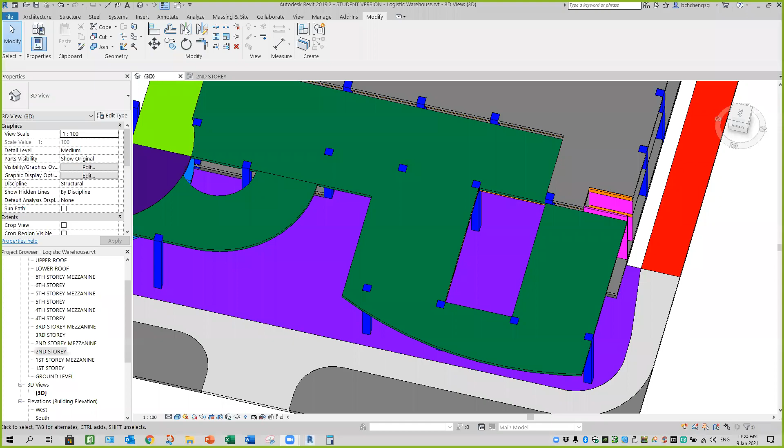Okay, so I was saying just now, I did create the slab here. I changed a different color to differentiate that it is flat. I call this the spiral ramp landing, same thickness, so when I decided to draw another one, you gotta redesign the angle again. You just confused? I got that's a good one.

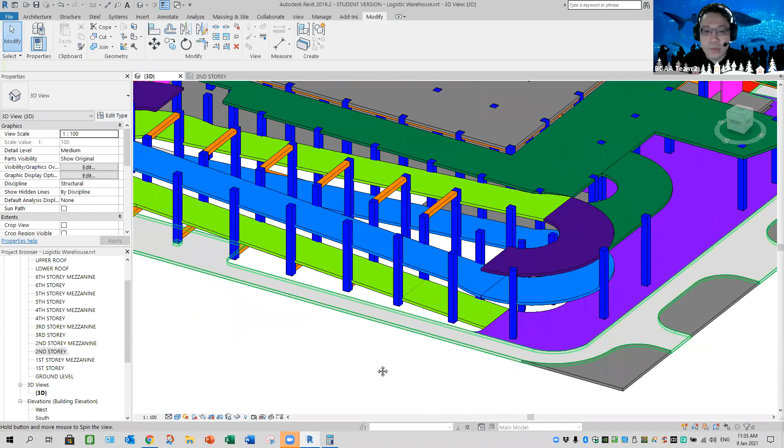Oh, okay. So please, now I actually did release the portal. So just now I was saying, this is what you call the suspended slab. So actually I should have another column here. I should have another column here. Or actually by right, there should be another one here that creates a connection.

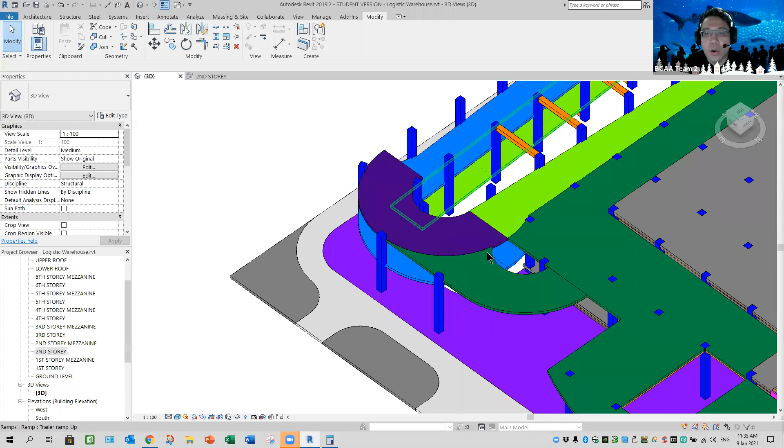So here in between should have a circular beam that supports. Because here should have one beam across. Here should have one beam across, and here have nothing. So the beam can go from here to here, connect, or from somewhere here connect. So I think some design change is needed here. See, Archi just randomly placed it in,

and yeah, something is missing. So I'm going to create this another slab which is connecting here at my level 2, that means second story. So you can see that I'm creating here, and some support added or required.

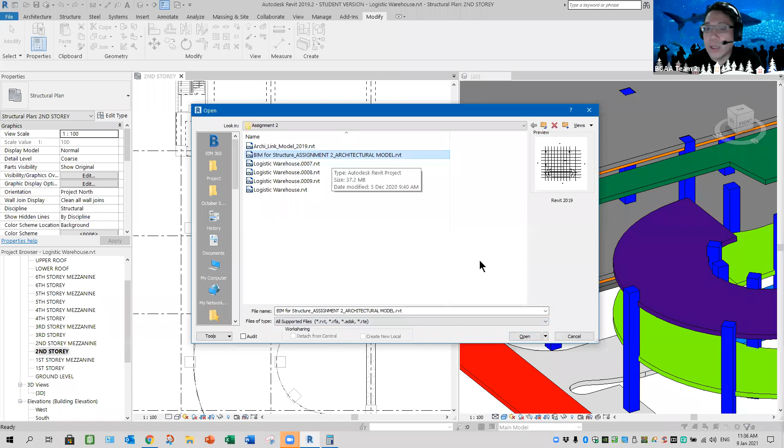I don't know what is this thing that is here. Sometimes very misleading. So at times, if you are not sure or not clear, my suggestion to you is open up the Archi model. So this is my Archi model name. The one I given to you is called Archi Link model. Actually, they are the same. It's just that I don't want to create a conflict, so I just give a different name.

So I want to see how the slab here is being connected. So I'm going to open the model from here and take a look at the 3D. Okay, so from here, this is the model.

What is the break there? Can't see clearly. I don't know why there's a slab here. I mean, the what do you call it? Parapet wall. Parapet wall should be straight. So some design fault down here. Very weird. Why is it stopping the vehicle from coming in?

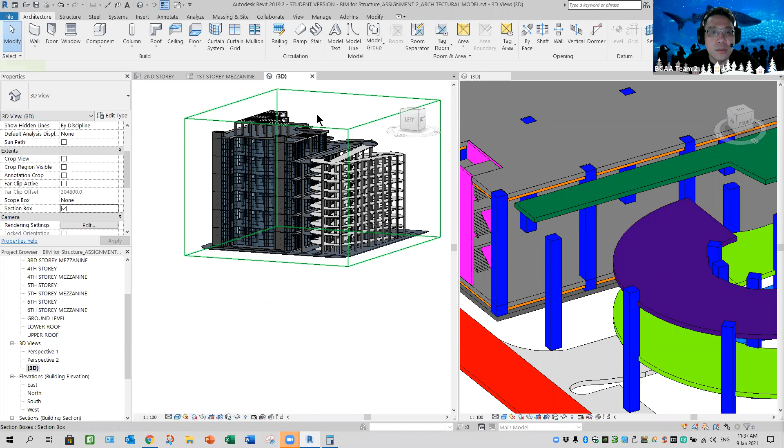Okay, let me enable the section box. Then I'll crop the view so you can see. Next week you should see my model more or less completed. Left only the roof to share with you guys.

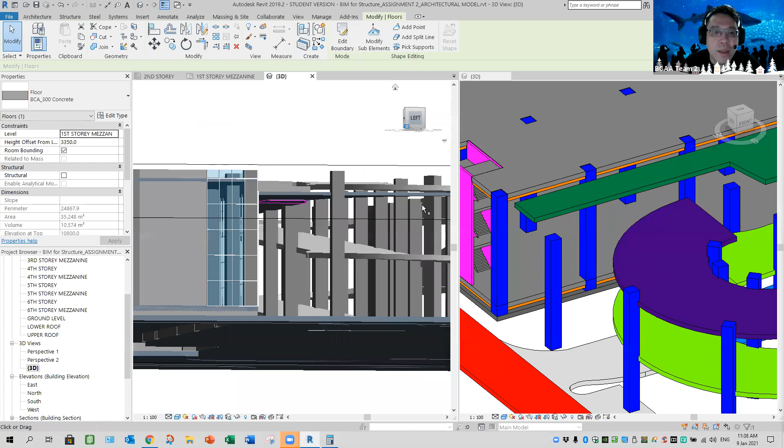So from here, see when they design the slab, there's two separate or overlapping slabs, which is not meant to happen. It confuses us. So that means my design here is wrong. Okay, this slab is more or less connected, but I don't know why there's some rubbish overlapping.

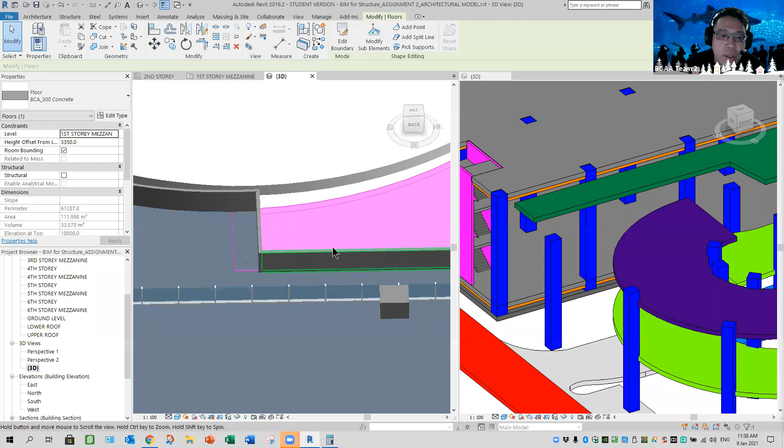Let me delete. Yeah, it's overlapping from somewhere. Okay, so this one is separate. No wonder there's two lines overlapping also. So I was thinking, why is there an overlapping component created? Why can't we just join them together as one?

See, it's very confusing. Okay, understand. So we don't design their method, which is messy. Okay, I think I'd better save that file, update them.

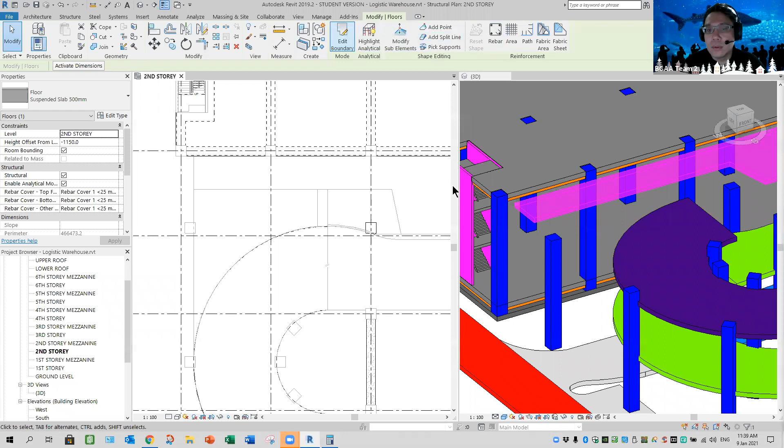So I'm going to select this because this creates the confusion over there. How come there's a line and so on? I'm going to modify this, edit, and copy the profile, which is here. So select, pick line, pick the arc here, and so does the arc here because it's a different contour. Now here a bit messy, so select this first. It should have an opening from here.

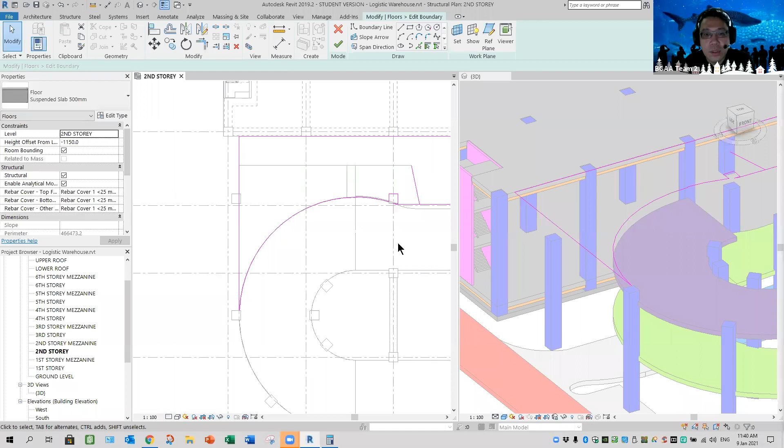Then pick line this, okay, and join this and this, okay, like that. As for here is this one and this join. So some of the extra things that are not required, you got to delete away because it should not be a separated slab. I don't know why.

So Archi file itself is, oops, what happened? Oh, overlapping. Two components identical. Oh, they are not joined. No wonder. What's happening? Hmm?

That's kind of weird, hold on, let me delete this. Okay, extend. Hopefully these two can meet. Clash into here, okay leave it. Important thing is you are able to close, so it should look like this. Yep.

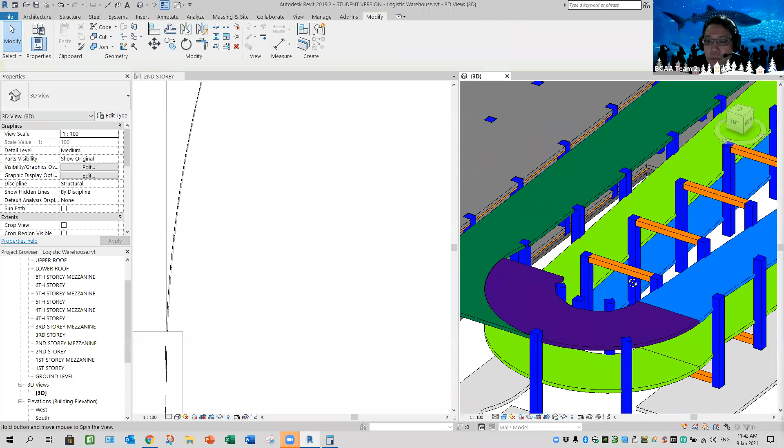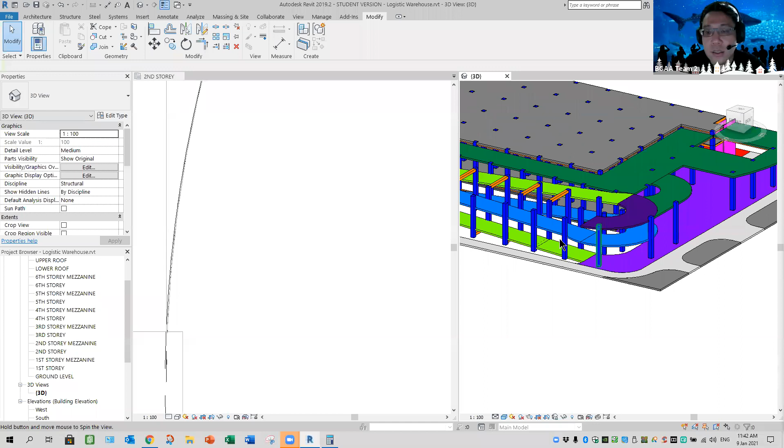Okay, so it's flat, so when your vehicle going down, it travels the way down to the blue one, then go out. So as I explained to Edgar and some of them just now, this is how it should be flat. But you can see the Archi design, this is twisted, how it reacts. So you can see some adjustment needed here, especially this ramp now to the next level.

Okay, so ideally, to avoid confusion, once you're at this level, you may copy and paste to the next level. So at least you can design where to stop the line and do some angle calculation adjustment, because from the Archi model, this suspended slab is the same throughout.

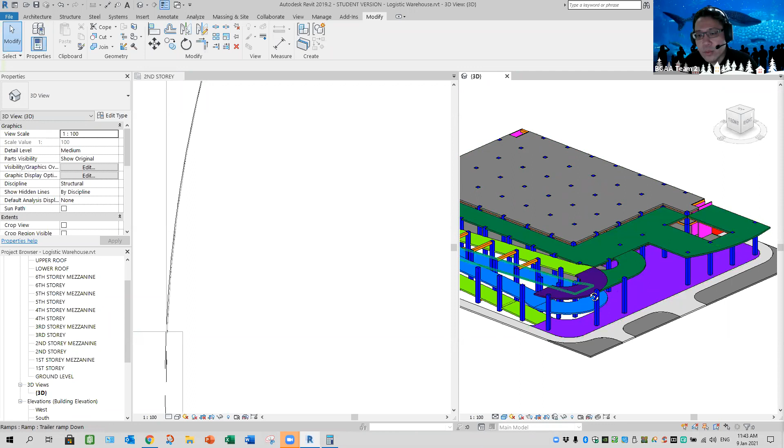All right, so that's what I said, that's why I said here, when you design this, do it level by level. Once the level is done correctly, slowly build your component up. Oh, so this is why the last 2 days I was thinking how the thing will look like.

Yeah, okay, so without further explanation, I will try to finish the staircase for this. Okay, so what I'm gonna do now for this here,

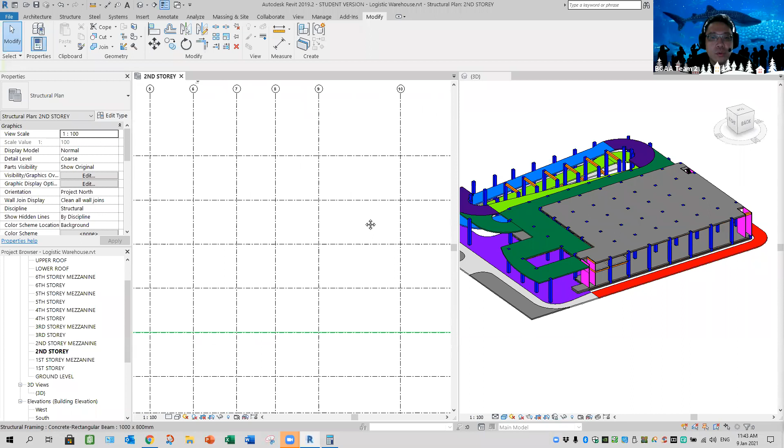I'll try to share with you all the information based on what I captured as it goes by weekly. All right, so take a closer look on that.

What I'm doing here now is enable the section box. Okay, then I'm going to crop my view, make it easier to see.

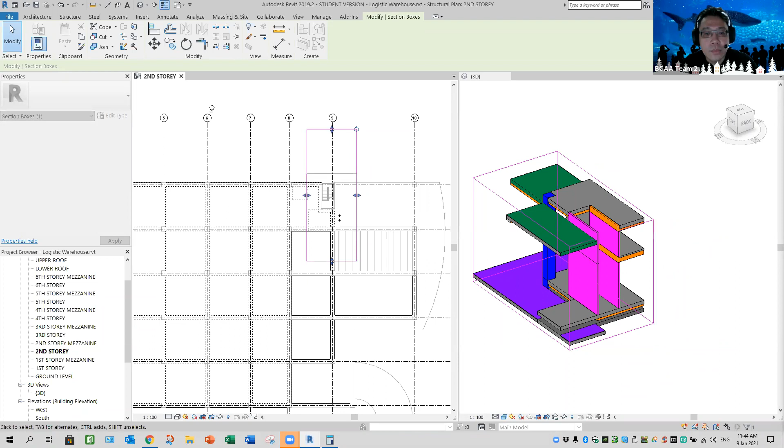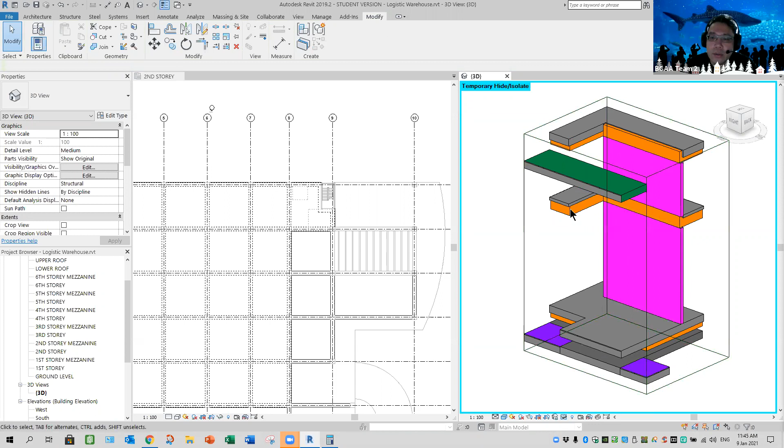Okay, so notice that, what you call that, there's level 1 to level mezzanine, then mezzanine to second story, they're different. There's a landing in between.

Okay, so let's go back to first story. Yep, like this, zoom in. Okay, you can see the arrangement is identical. I don't know why this guy copy is also, there's an offset. Very weird, I don't understand.

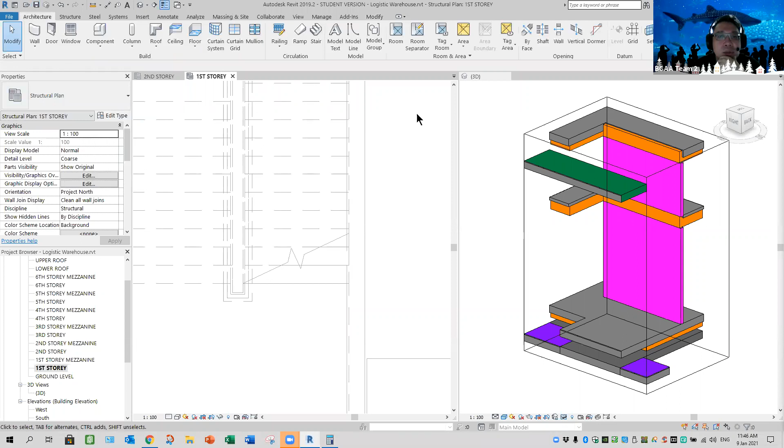Okay, so it's going up this way also. Okay, so I think we can snap from here straight away. So I call this staircase exit 2 because of different level. Here I will create one called exit 1.

Duplicate, everything the same, no change. Duplicate, exit 2. All right, so no change at all. Be okay.

And of course, first story to first story mezzanine. Yes, 7.5, it's not 800 lah. Oh sorry, it's not 8 meter, slightly lower. It's different, huh? All right.

So same thing for the straight flight. So I'm going to follow here. So let's snap first, I think here should have a 50 mm. But let's wait and see whether it throws any error or not.

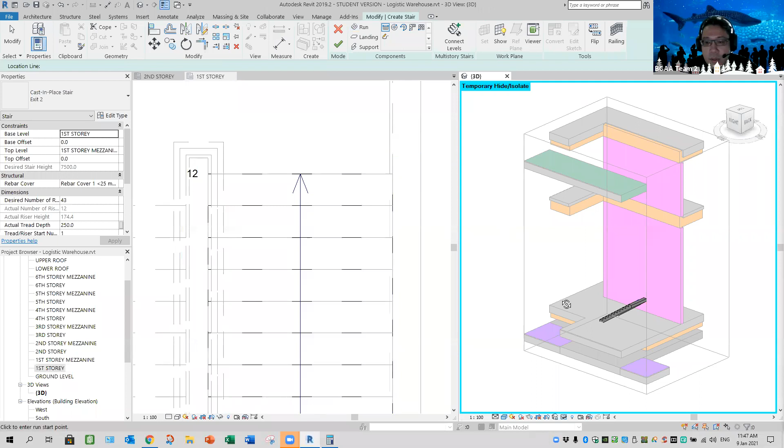Okay, I'm going to select from here, 1 and 2. Okay, okay, the view here, let me see. Okay, I think this way is easier to see. Okay, you can see from here it's sitting inside, so I think here should have a 50 offset.

Yep, it's coming up now. Yeah, so it's okay. So next will be here. Now will be a bit tricky, the distance here for snapping.

You're going to snap according to the wall, not according to this here, because this is not accurate. Okay, let's do a double check measurement, make sure it's 3000. Oh, it's not. This area here is slightly narrow, short of 25 mm.

Notice that means the Archi model is not accurate. Yep, no wonder I see a gap here. See this? I believe this should contribute to that 25 mm. Ah, expected.

Okay, so this wall is wrong. Let's finish first. Maybe, yeah, the Archi guy maybe tries to make us understand, so sometimes don't be fooled.

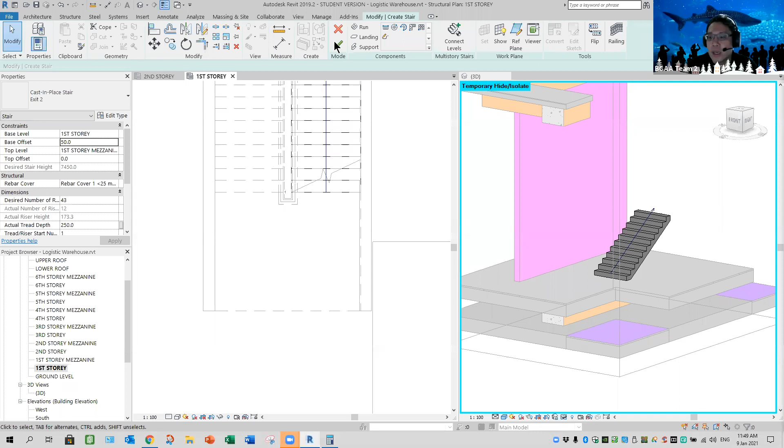I would like to measure, because look how weird, there's no overlapping on these ends. You see? Yep, I got you, you are right.

So here I'm going to adjust my wall first, so I got to reset this wall back to make sure that it's clear. Yeah, see the 25 mm extra? Not say extra, short. Normally it's normal to have an extension, but it's too obvious already.

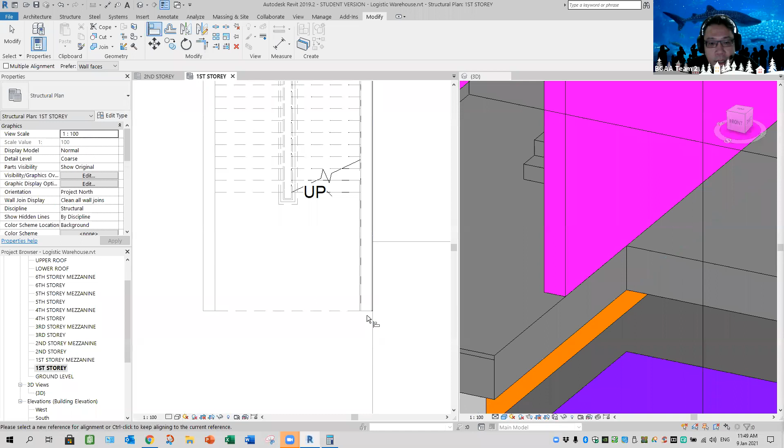Okay, so I'm going to readjust this, modify, align to this wall, this to this. So it should be shifted down, see the double line. Okay, the top one, same thing also, align based on the surface and surface. Yep, so that means this design here should have some adjustment.

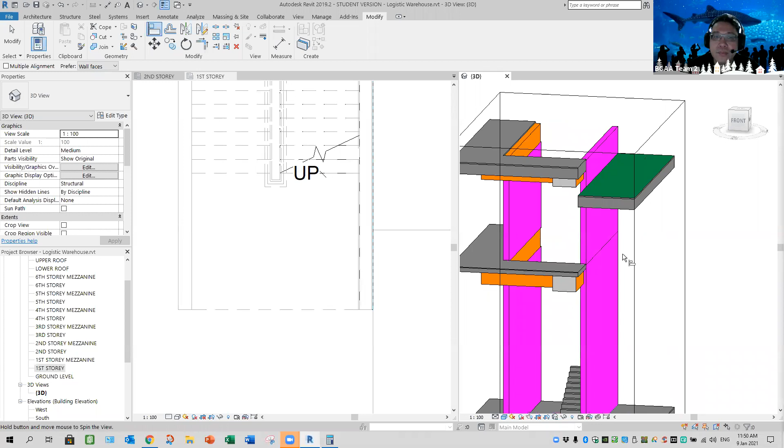Okay, so level 2 here should have some overlapping. Yeah, expected. Okay, let's modify this at the boundary, double check. My model looks okay. Yep, it's in line, so it's good.

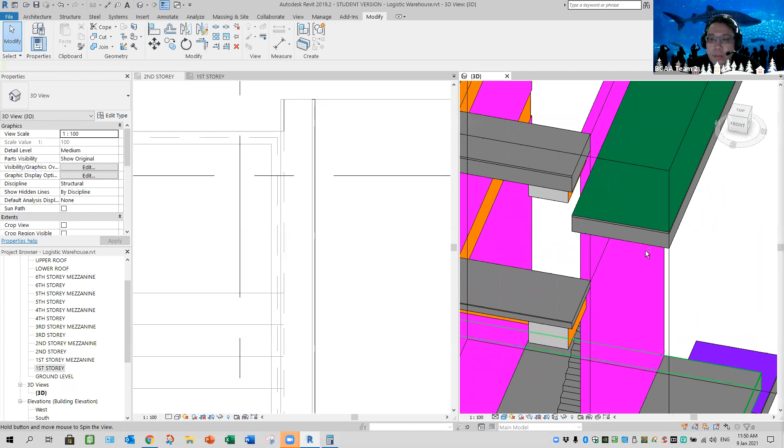All in good hand, lucky. Yep, okay, so seems good, I can proceed now to the model. So let me hide this wall again, sunglass, hide. So sometimes when you guys do design, got to be extra careful. Yeah, very tricky.

See, I see some extra thing down here. Archi model is really full of funny stuff. I don't know what happened, how they design the thing.

Okay, so select and edit stairs. Then of course I got to do the adjustment because this is correct. Is it? Hold on.

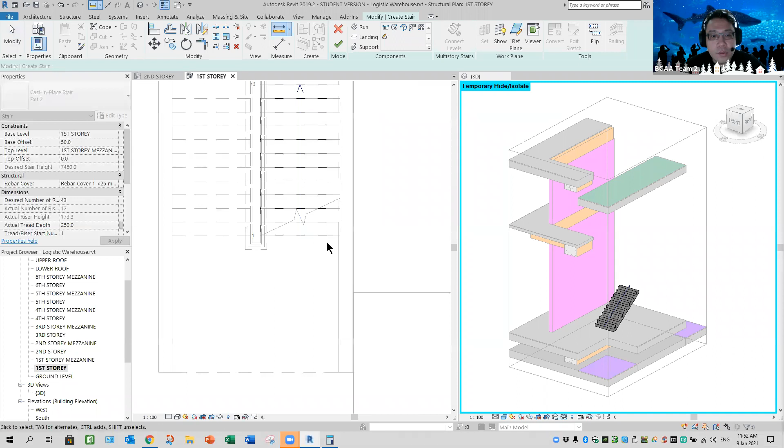Distance from here to here, 3001 now. Okay. Our staircase seems to be okay, it's correct, right on track. Measure here to here, 1625 minus 150, 1475 should be. Yeah, okay.

So run, select this, stop here. Okay, continue, here again, goes up. Then last one, which is here. Yep, complete. Still some more. All the way. Wow, scary, eh? See now,

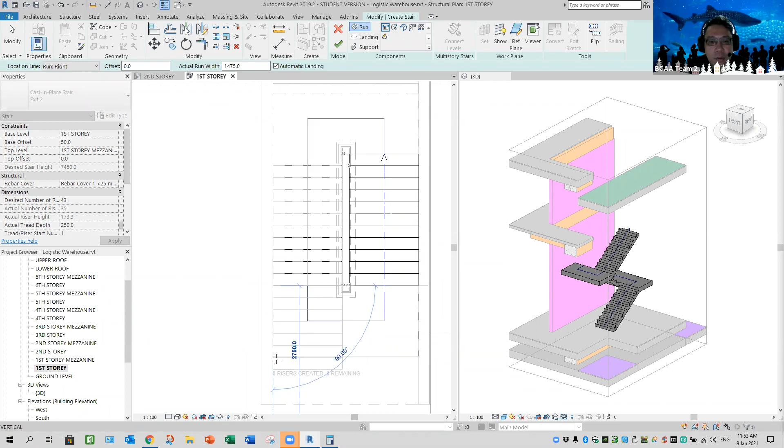the levels a bit weird. Okay, what's happened to my design? Oh sorry, the snapping doesn't continue from here. Hold on, should be here. Yep, finish it.

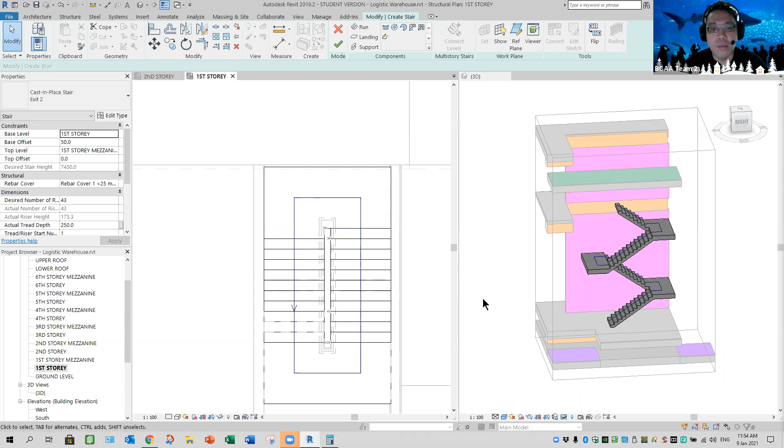But you can see that it's really short by 3 step flight. That means of this additional step flight here. Okay, that's why it's short. Okay, so that means it's wrong, so wrong means I will delete all this.

It's wrong. I try to match the design, and this is a dotted line. We should not go over it. So run again.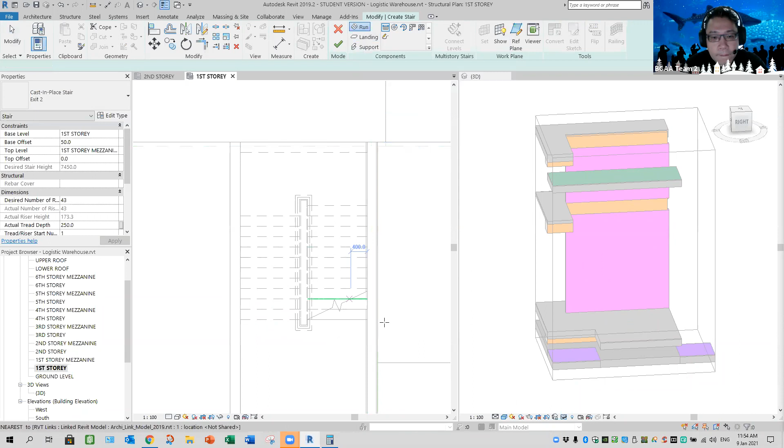Here, stop at this. Yep, then maybe from here, continue. From here again, up to here. Last level, from here. Still one stair flight short.

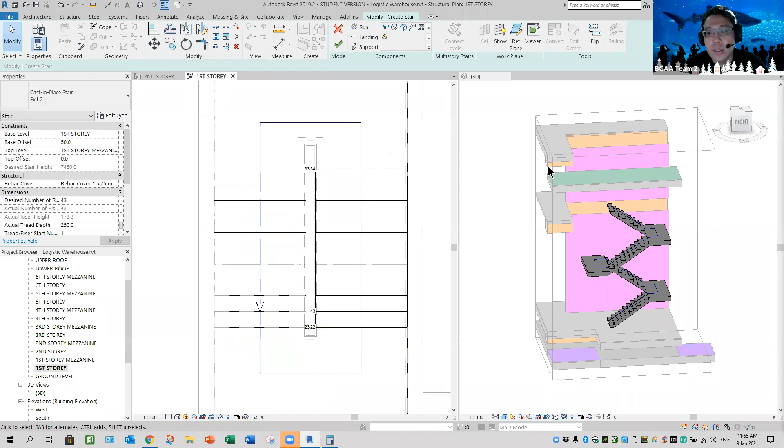Actually it's correct lah, because your landing is considered 1, as I mentioned earlier. So you look carefully, it's still correct. See your landing? It's still 1 stair flight count. But at least now, this is extra, which is not meant to be like that. So now it's correct, okay?

So as I said, we adjust this, so my model, pick this fella. So now at least take this as a guide lah, to stop there. One, 4, 7, 5.

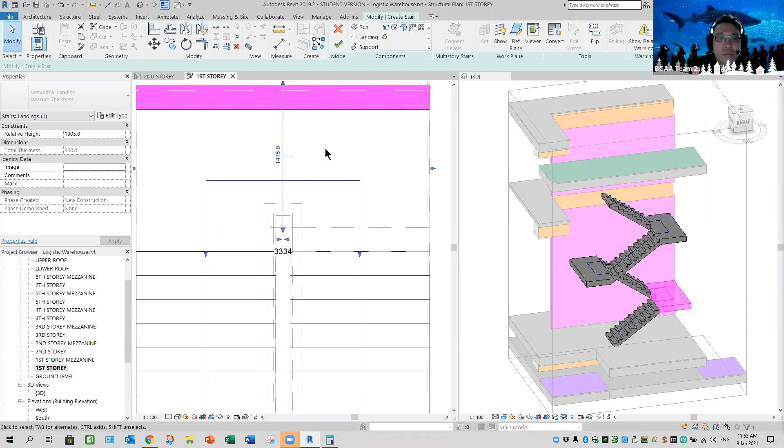Okay, the exit doesn't matter, we can move it, still plenty of space. Here we don't have that line, so I'm going to reference plane, pick line, offset 250, somewhere here. Adjust your landing, drag it, touch this, change it, 1475. Yep. Get this one.

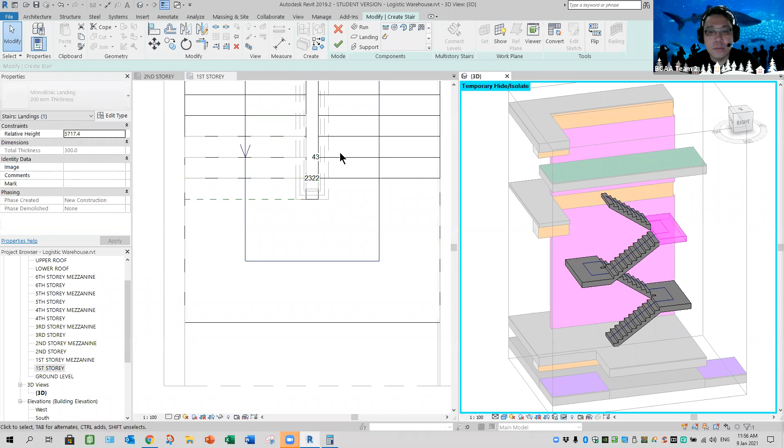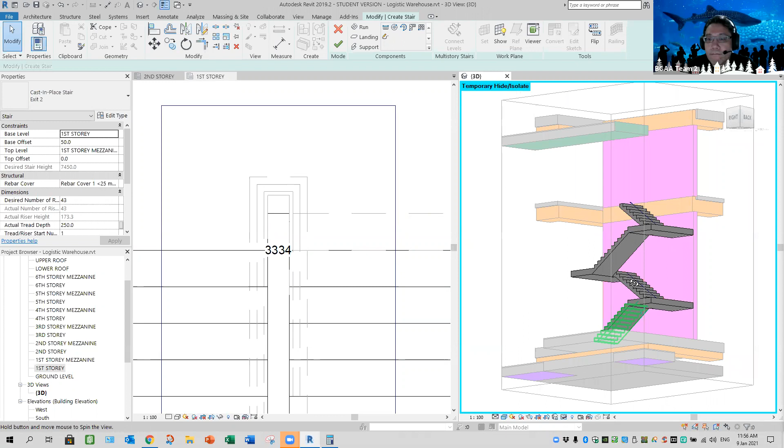Okay, so this stair flight done. Okay, the connection here to this later first, because I'll do this second mezzanine to second.

See any difference in design if you want to follow. So I need to go to level 2. Now level 2, you might see your staircase here, which is sometimes quite misleading. Of course, you cannot draw the separate one on top. All right, yeah, because the design here level is different. So I just click finish first.

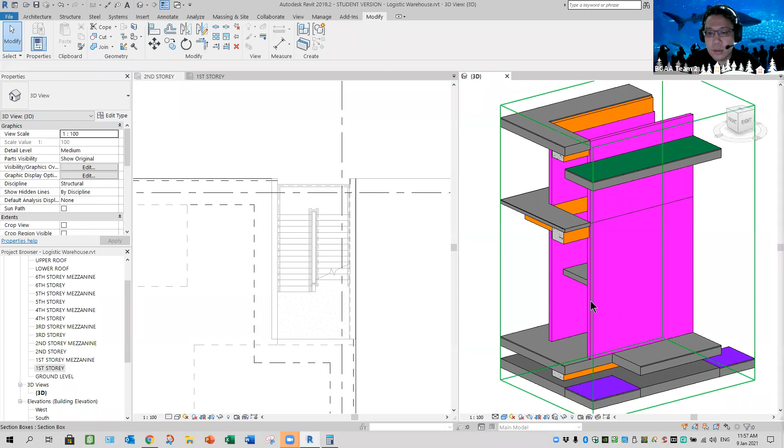And to avoid confusion, temporarily, I will hide this also. Yep. Okay, so in your view, this view, you can leave it. Yeah sorry, let me reset this. Only in your plan, we want to hide. Okay, because 3D model, we can

see how the model works here. Yeah, so we can estimate later the landing and so on. But in our plan here, can we see any staircase? Seems like I can't see or select any staircase here.

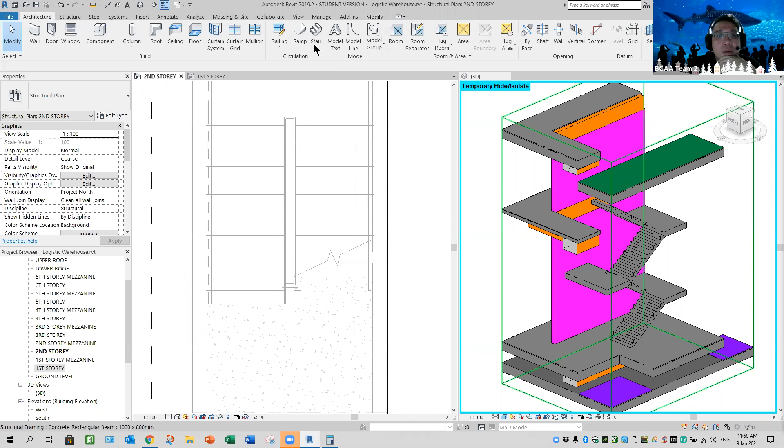Okay, so you can see the adjustment, there's a bit difference. Okay, so let's proceed. Second, stairs. In this view, is second to second mezzanine. No, it's to be first mezzanine, or you can actually open up your first mezzanine plan. Yes. Oops, join here. Yep, not there.

Okay, first mezzanine to second story. So this is 4.5 meter, 26 stair flight, so that means it's 13 stair flight. Okay, you notice that the Archi design here, they care about this, but this space become cramped. See, it doesn't comply the code.

So we got to be careful. That's why I say we sometimes we need to relocate. Do not follow them blindly. All right, I'll still draw from here. So now they increase to 26 stair flight, 4500.

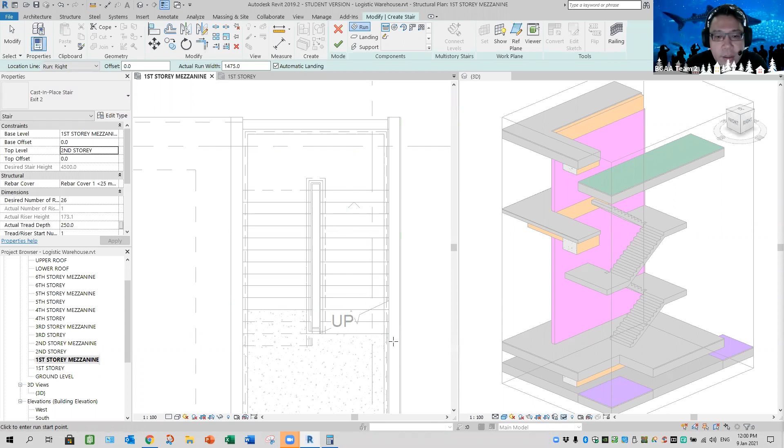So run, 26 means even 13 stair flight. So select from here, be sure this is the correct one. 13, 11, 12, 13, yeah. Then if we follow 13 from here, which is this, exactly flush.

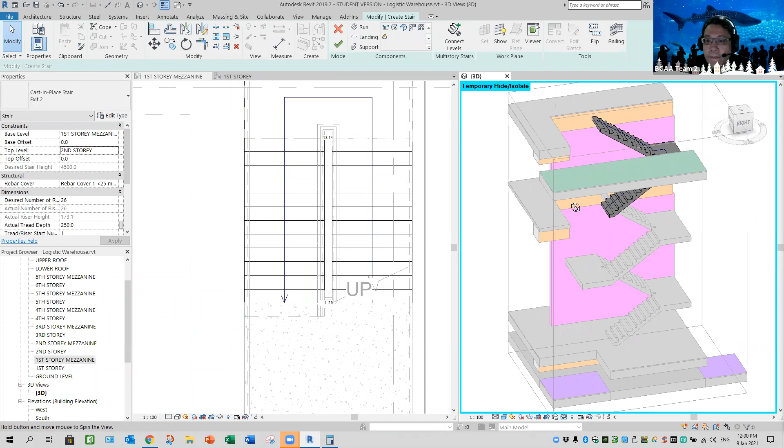Let's do a check. It's a bit different, see or not? I still reach the level, it's okay. Important thing is later the opening cut. All this we got to be careful. Yeah, so it's still achievable, but remember to do the adjustment.

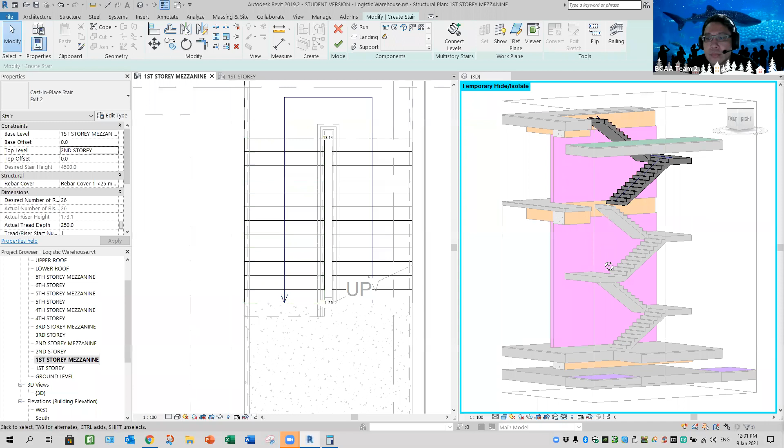Now all this, I don't need you guys to follow me exactly in a sense that oh must position. I just try to match as close as possible, because Archi given all this information to us. If it's correct, yes, it matched nicely. But sometimes due to calculation or design, they might make mistake or they might be overlooked. So we just try to design as close as possible, but it's structure, not Archi.

Could be this design, this drawing here meant to do some havoc. I don't know, it's difficult to say. That's why it's also telling us when you are working next time or doing internship, don't trust all these 100%, because they never interpret correctly, or the architectural personnel that do all this might not be doing a correct or proper work. So we always need to double check.

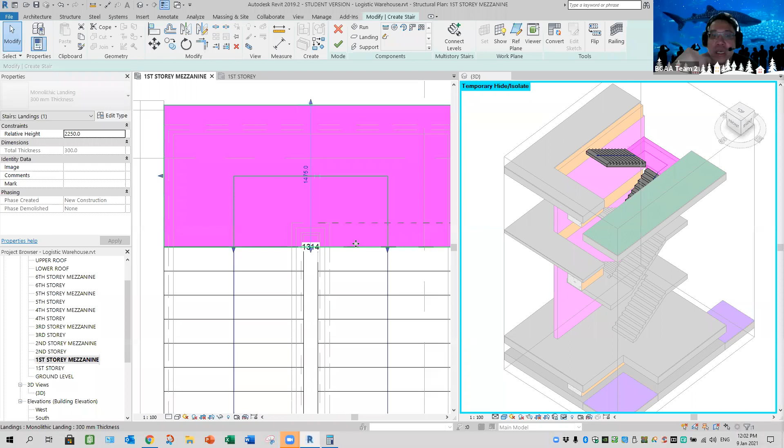Lucky we are doing BIM because it's design stage, not actual build yet. Last time, if you think there's no BIM, what happened? Everything go to cast, hack, cast, hack. Time wasted, money wasted, resources wasted. But from BIM point of view, we can determine right or wrong before we proceed. So this is something that now you know why we are doing BIM. It's to save time, save resources, important. Design change makes it easy. So a lot of things we got to be aware of.

Do one thing, don't follow blindly. That's important. Okay, 1475.

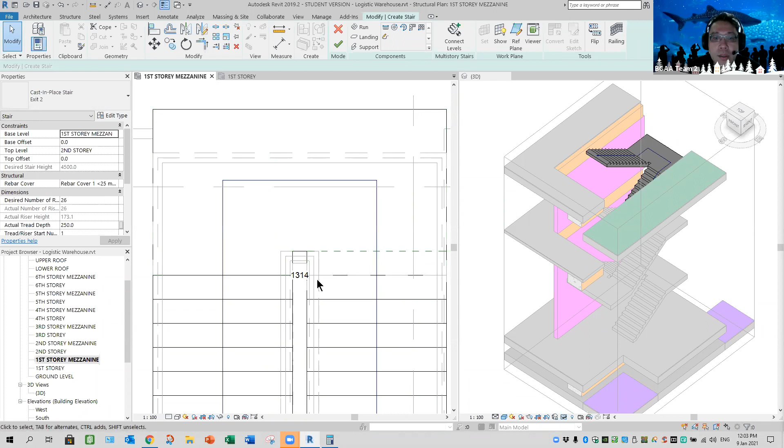At least here the clearance, no matter how what we design, we need to comply. This is important. We have to set up the clearance. So you can see that from here, this is 1475. This is also 1475 because escape route is very important.

All right, so more or less it's done. Now you can move one by one. Okay, so since there's a facade here, this particular guy we got to align, follow theirs. So align the link model distance to ours, so the whole thing shifted in.

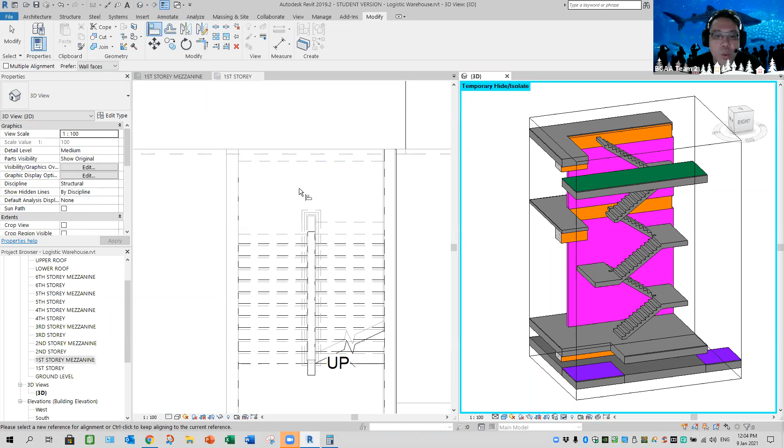Okay, so I will not care about the designs from there because it's not accurate based on the Archi's own model. So same thing like ours also. Go back to your first storey, select this one, align ours here. The whole staircase should move. So if you don't want to base on this way to do the arrangement, you may want to use this and this alignment, it works also. Okay, no need to lock. You can base on model to do the alignment. So it still works the same.

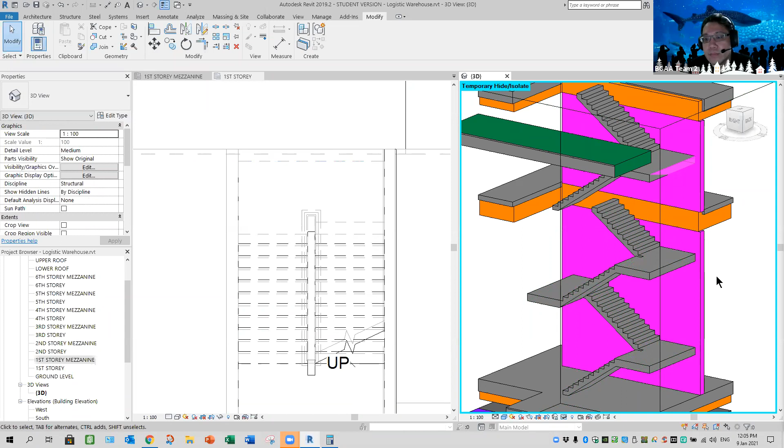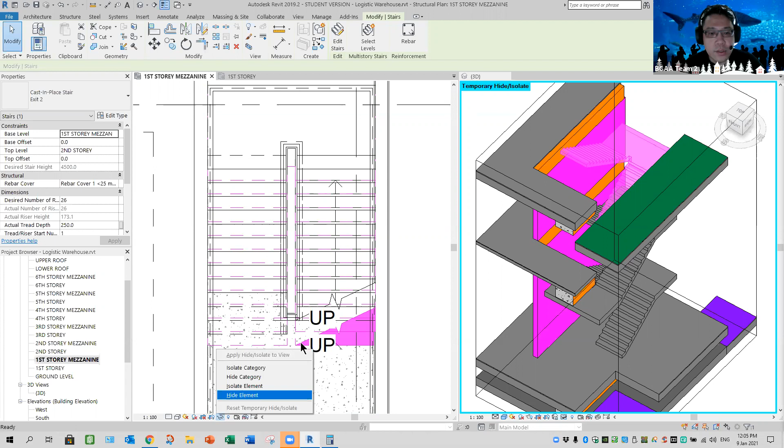So at least when everything's done, now it's time to create this special landing. Here should be empty because that's Archi facade or what you call the curtain wall. Now it's here, how are we going to design this? So I need to go to mezzanine level, which is here. The staircase on top, I'll temporary hide first. That means this one, come to your view, you hide it first, so at least won't see so many components appear there.

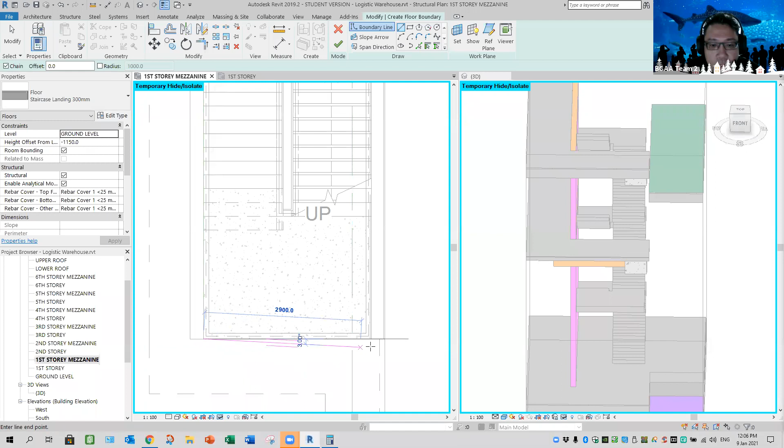Yeah, so this is the landing that we're going to build, the staircase landing. So I'm going to select structure, floor, structure. I already have one called staircase landing 300. So from here we'll sketch. I wonder what's all this dotted line here. The railing, I believe, but that one is later. I'm going to draw my slab here, which is this one, and closest to my stairs should be this.

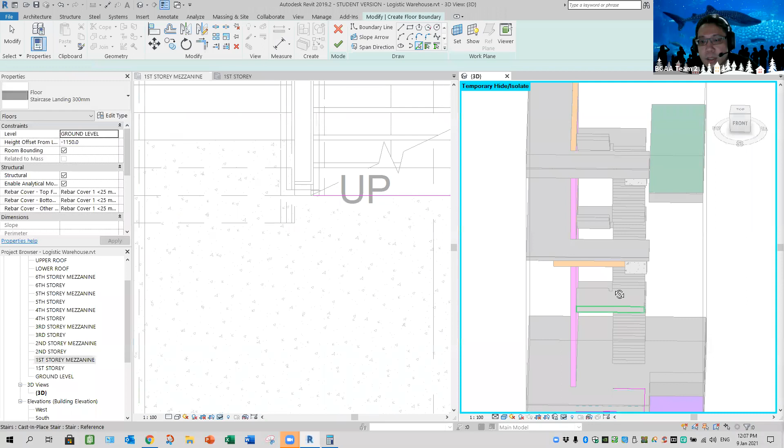Sometimes got to be careful because you might not be able to snap. Very weird, huh? Okay, if you cannot, you can draw somewhere here, then use pick line method to pick this. Okay, so the opening here should be flush to this side because you got to connect to this particular one, which is here, see.

Why? Who's that just coming? Oh, somebody, Zifeng, huh? Zifeng just coming only. Oh, there's another login.

Okay, so you can pick this line. As I said, if you're not sure, get the rectangular shape form first, then we edit slowly. So finish it. Oh, forget to clean. Okay, finish it.

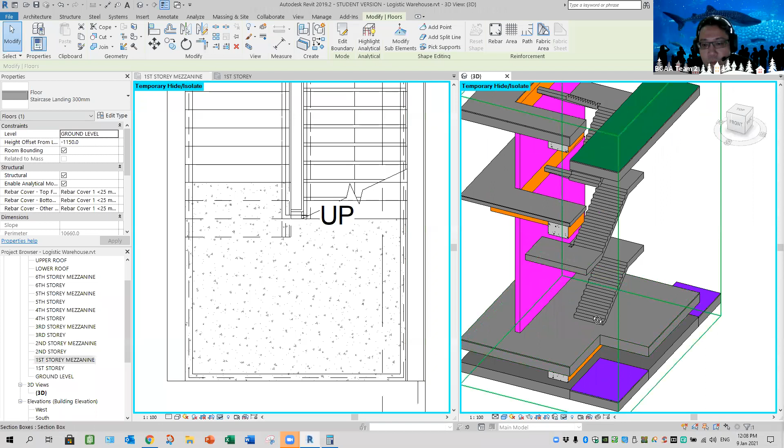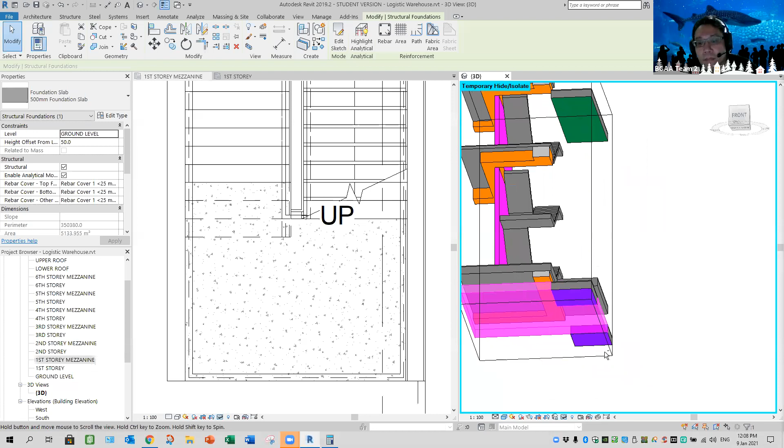Ground level again, I always create at ground level. Ayya, this one I can't see. Where is it? That's kind of weird. Hmm, disappear. Is that magic?

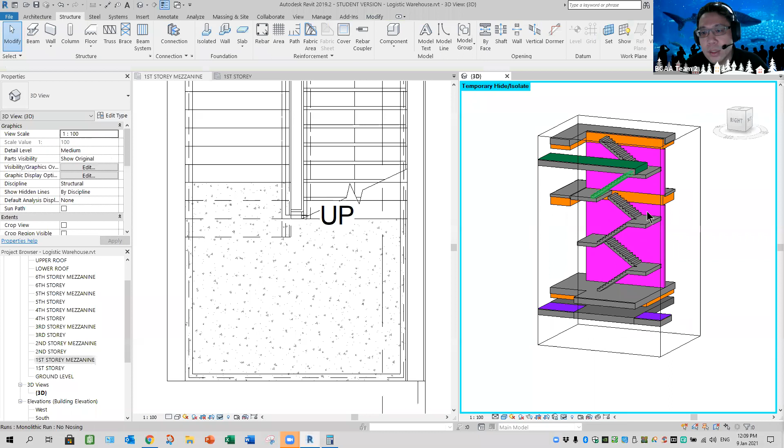Ah, terrible, it's here, ground level minus. No, this one should be mezzanine and there's no minus 0. Here there's a drop of 50, it's normal, don't worry. See, it's wrong. Oh, I measured the wrong one, it's the other side.

So you may want to align using this method, then you change. Yeah, this is the lazy method lah, huh? Makes it easier for you. This face to this face, you shift. Then you edit. So select this, go back to your view, align. Edit boundary, here, align this back. So it should be done.

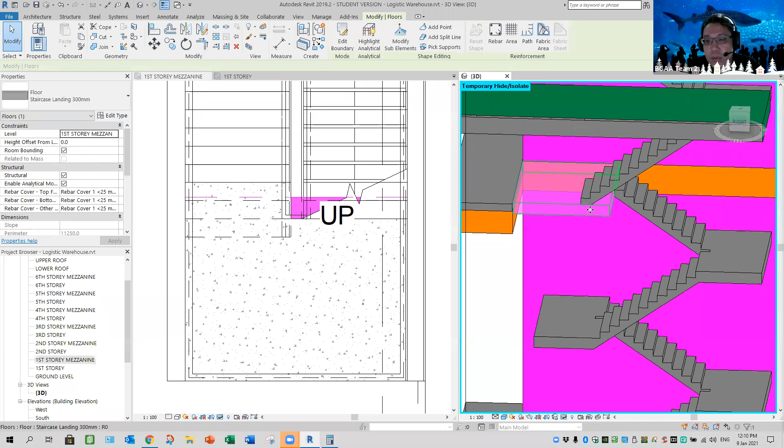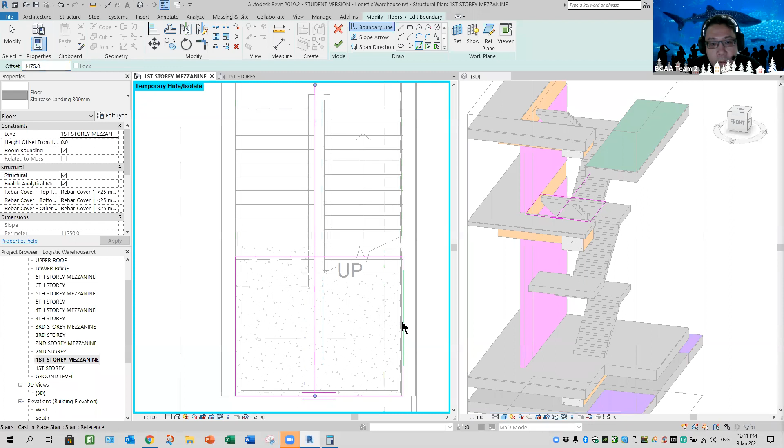Nope, and here you got to support below here. So the tricky part here is this one. Okay, let me see how we can do that. Okay, edit. Pick line, offset 1475. That. Okay, then here. Split. Split.

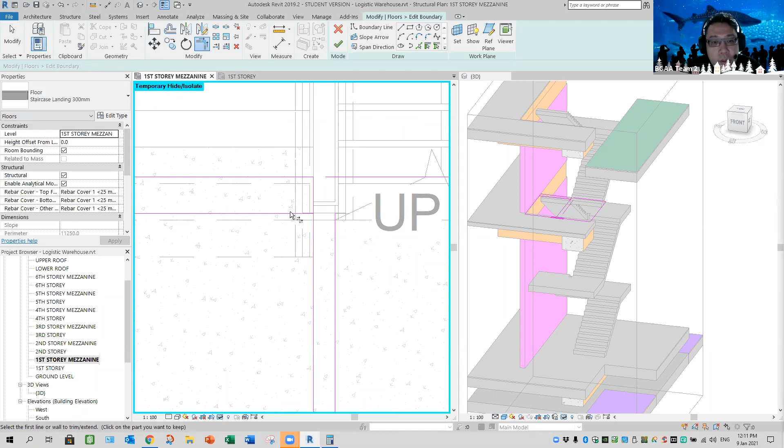Okay, so here from this line, pick line offset 250. Sorry, here, this line here. So it should be closing this and this, this and this. Oops, sorry. This and this, then this and this.

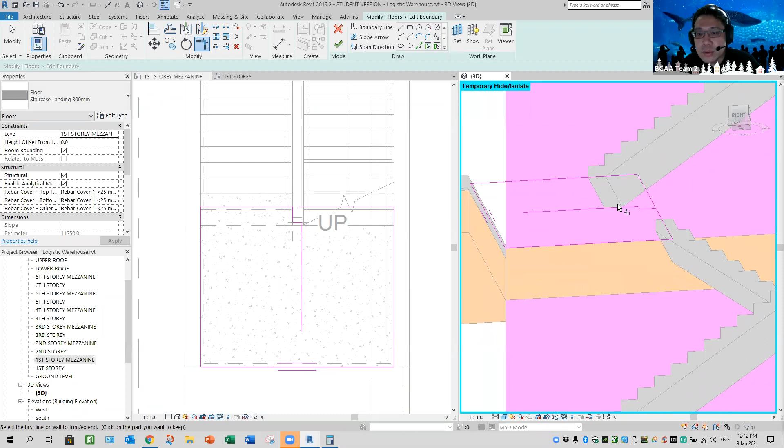Okay, but because here is the adjustment, which is slightly lower, but because here we don't have a line to capture, we're also quite difficult to align this way. Unless able to align based on this, if that will be fun. Okay, here and this, see, not allowed. Yeah, pick line, pick this. Cool, we can done that.

So this is not required. Oops, let me delete first, then we can do the clean up. If they allow us to snap, then we are super safe, like that. Okay, we are good, finish it. Nope. So it looks like that, but the design looks funny. All right, this was to stand up somewhere here.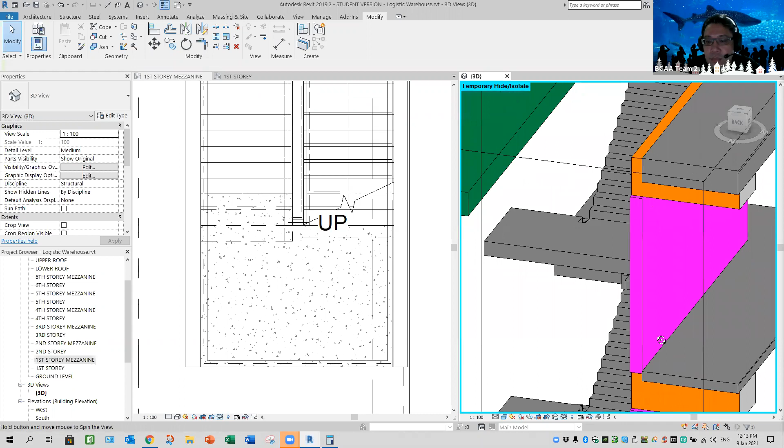One step looks very weird because of the connection. It should be flush. Yeah, sorry, it should be flush.

That means this, delete. This one's also delete. These two should be close together.

Okay, take a look. It should look like this. Yeah, because of the supporting here. But it should go further.

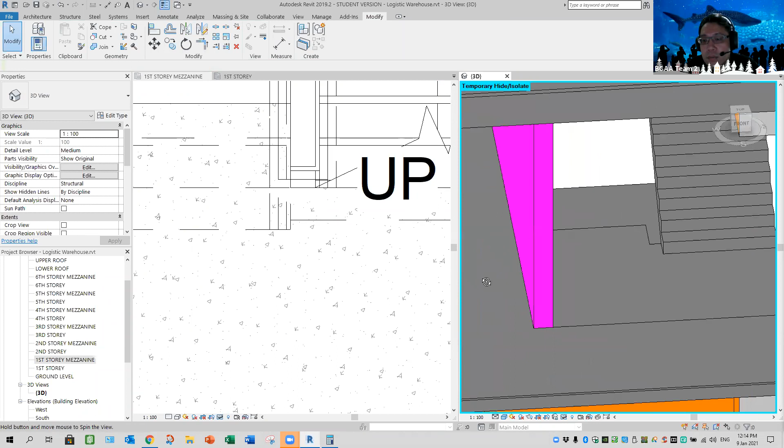No, how? If not, it looks super weird, right? Correct or not?

One step there, people can throw a lot of rubbish. Yeah, this looks weird.

Edit. Why? No, sometimes it's our step. I mean, understanding it is a bit tricky in a sense. Yeah.

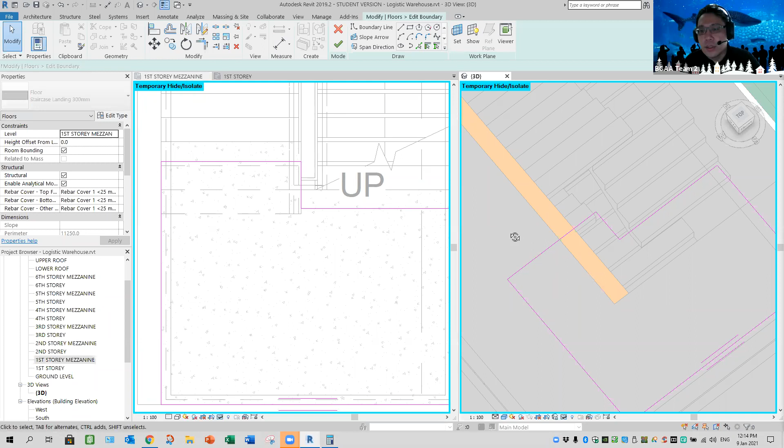Anyway, we are all part of a learning curve, so no worries on that. I just want to at least make sure it's done nicely.

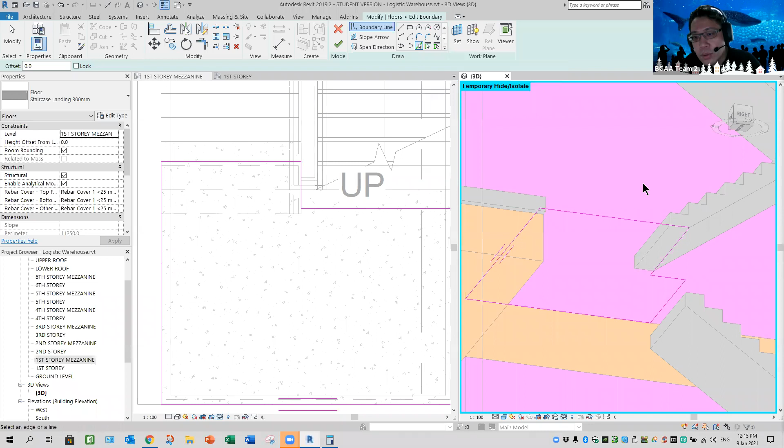So I'm going to pick line again, which is this line. Pick line boundary. I don't pick face. Edit boundary. Unless allow me to draw one.

Okay, I draw because I want that offset of 250. So actually this one here, move. I might be doing some very old traditional step, so don't follow me blindly. If there's a better step or option, please go ahead.

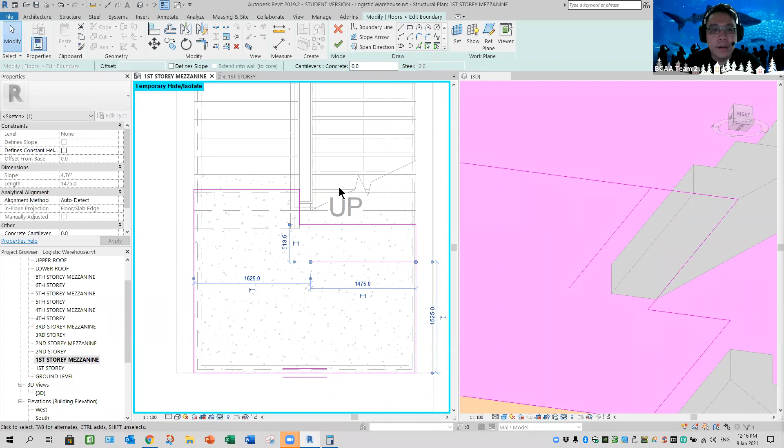Oh, yeah. I'm a kind of slow. So you all do what you think is right.

But sometimes when thinking of design to modify at the same time, they need a lot of so-called fine tuning, and you're doing multitasking, trying to understand the logics behind. So it's a bit tricky. I'll try to think of the design concept or some adjustment here, which is what I want to see.

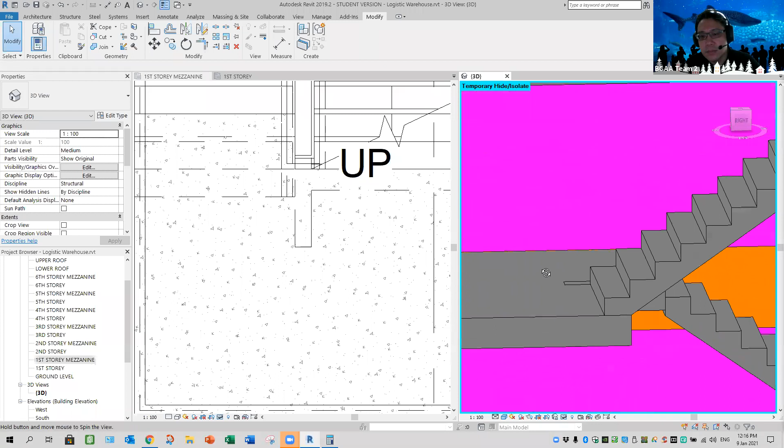You see, yeah, like that. But I can flush it. But I was thinking, is this better? Okay, yeah, this is what I want to achieve. Okay, so this is what I want.

Okay, the next one you may want to copy something similar, like select from here at the mezzanine level, copy - sorry, not this copy, copy, paste to second storey.

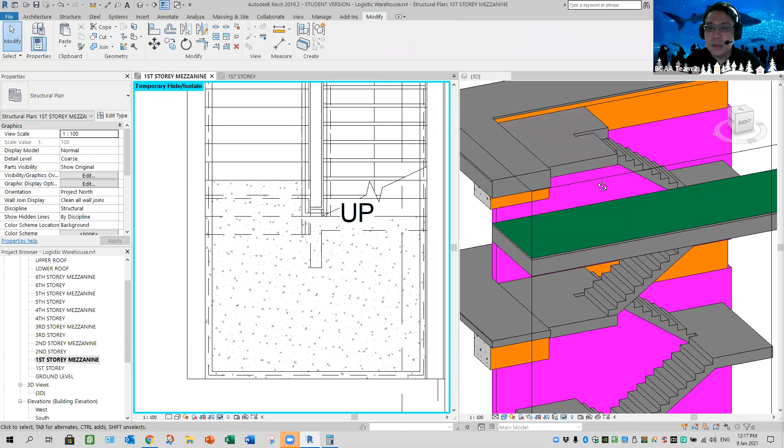It should go up. Yeah. So from here, you can further design these changes. Yeah, okay.

Oh, all right. So this view here, now you can go to your second storey. First storey mezzanine you can close now, because if you're going to edit, then you've got to do the alignment. So align where?

I can't simply just keep aligning the model. Align here to here - see, it doesn't make sense at times. See the step?

If I pick this, good, it follows. It follows, then we are safe.

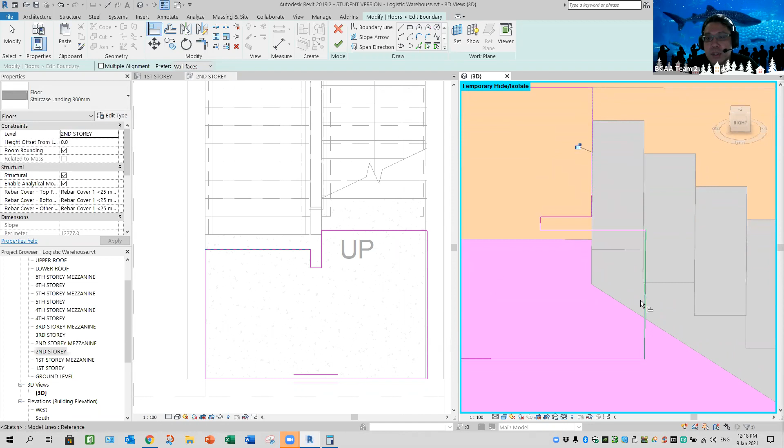So this piece here, you can have an extension out or you leave it first. Why? Because you need to copy this to go up. Then the whole scenario repeats again. So this design, I'll leave it first. As long as this landing is correct, then you are doing a great job.

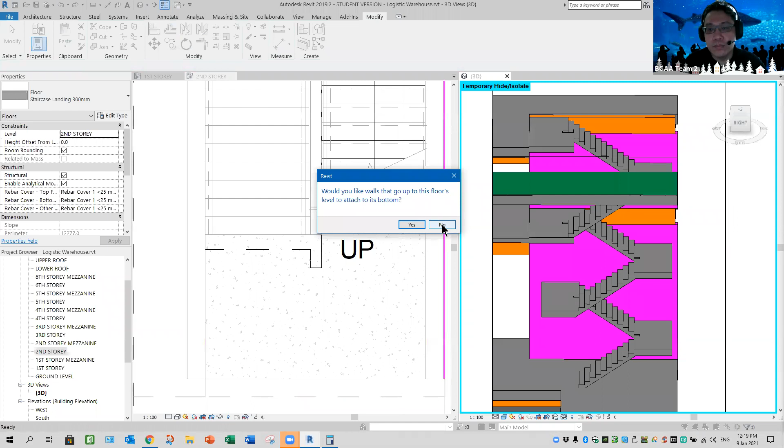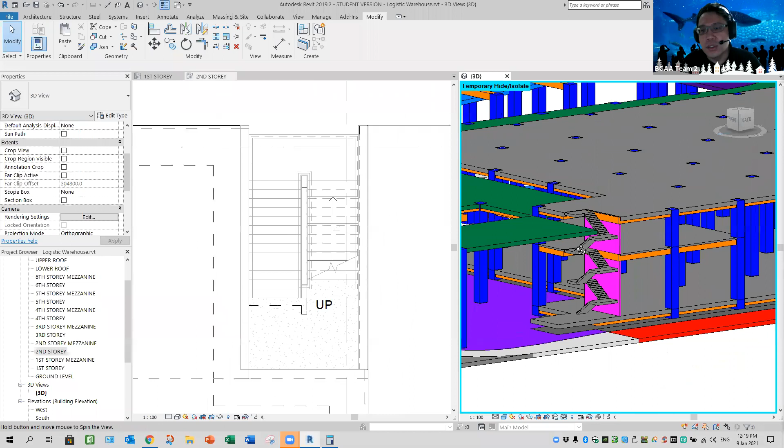Okay, so I hope that from here you can more or less understand better. All right, so a few things you can see from the way I design and the placement, the movement, how you end up adjusting all those details here and there. So structure, of course, this is my detail up to a certain level, and you know that for structure, LOD is 300.

Next time when your model is up, we'll try to do some rebar. Like, okay, we have a column here - how we're going to do our rebar detail. Okay, any questions? I'll leave it to next lesson.

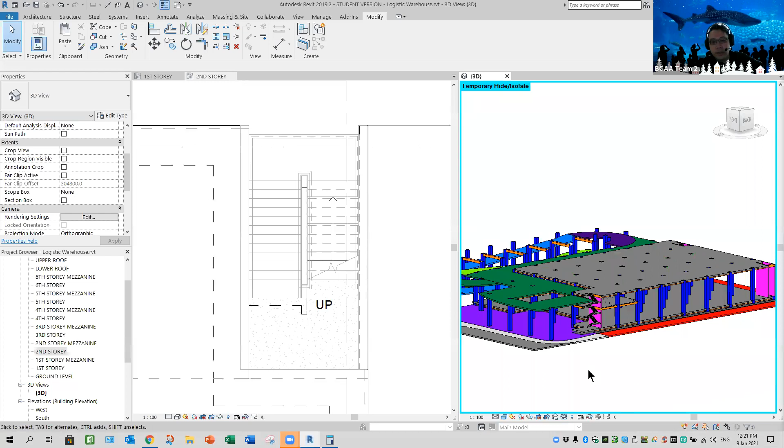Okay, then next lesson I will show you how to add the beam system, which I think I did show you, but I've forgotten because that was last year - last term's information - but I'll still show you again.

Okay, yeah, so this picture from time to time I will snapshot and upload so you guys can compare. It's like helping you understand, not just letting you copy whatsoever. To me, understanding is more important; copying is secondary. The important thing is to understand, and I repeat this in the video here and there.

So once you get your staircase here correct, the rest should be identical. Yeah, but double check this one. Hopefully this is sitting okay, it's not floating, so it's all right.